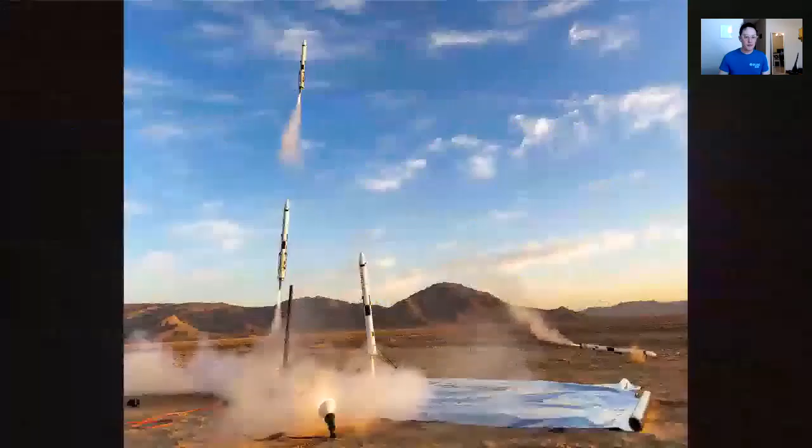We have a pretty big YouTube channel, and there's a bunch of interesting projects going on. I'm actually working toward doing a big space shot in the next few years, and I thought it would be cool to talk a little bit about finally completing the landing portion of this project. So I propulsively landed a model rocket in the last year, and I wanted to show you some of the development path of that.

A lot of these slides are just nice, pretty images, and I'm going to talk you through some of the details. I figure if you want to toss questions as we go in the Q&A, I can try to address them during the presentation. We can do a Q&A after as well, and I'm happy to bring up other materials or whatever.

This is a great little composite photo - I think this is the first flight of the rocket that ended up landing. I've built a bunch of iterations of this model rocket, but this one is called Scout F. There's been Scout A, Scout B, Scout C, all the way up to F now. This is the first flight.

You'll notice it doesn't have fins. It uses thrust vector control to keep itself upright, so it gimbals the motor at the bottom. And then when it comes down, you can kind of barely see over here, there are these landing legs. Let me make sure I can move this out of the way so I can point with my mouse.

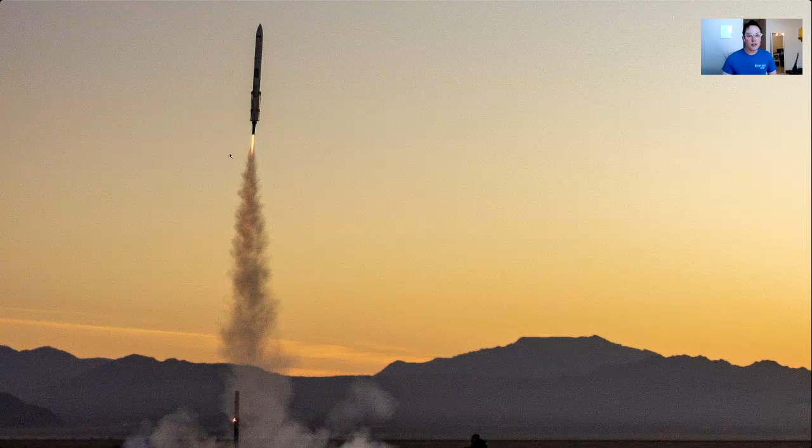So we've got these landing legs down here, and obviously this flight doesn't work well, but I've got a couple of nice photos here. You'll also notice the motor hangs out very far from the back. This is an Estes F-15 rocket motor, hangs out super far from the back, and that's just our ascent motor, and we ditch it upon the time that we're supposed to land this rocket.

So this is it coming in. I like to think of this as the entry burn photo. All of the exhaust goes up in the wrong direction, and you can actually see right here, this is the ascent motor that's getting ejected off by the landing burn startup.

This is another photo, really compressed, so it makes it look like the rocket's a lot bigger than it actually is. But all these launches happen at dawn in the desert because I really want that beautiful light. Getting the sky like that makes for really compelling photos.

So I figured we'd start off with just some pretty photos of this rocket, but why don't we talk a little bit about the technical details, and then we can get into analyzing the flights and seeing how things happened there.

So this is the flight computer that ultimately ended up working for the landing, and I can talk you through it a little bit. This is called AVA - it stands for All Vehicle Avionics, and it's a computer that has been developed over basically the last 7 years of just iterative design, trying to figure out what is necessary for this project and what is not. It's a little tricky because this has a lot more going on here than is actually needed to land. Frankly, if you have a good IMU and a nice processor, you're 90% of the way there.

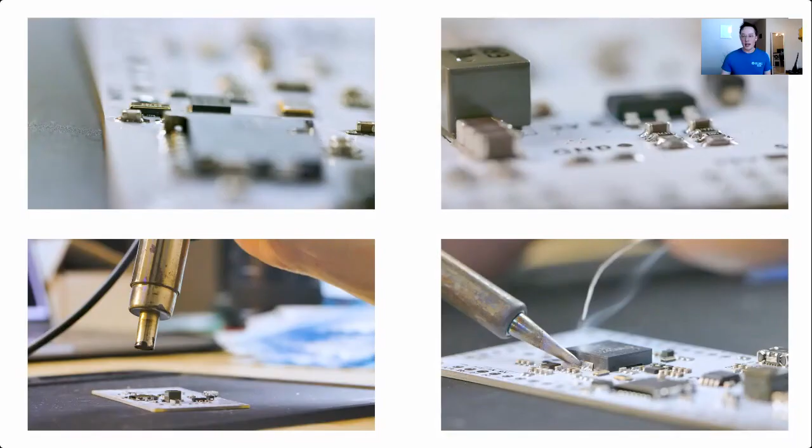That is not really important for the propulsive landing stuff. These flights are about 10 seconds. If you've ever seen one of the videos that I make, it's about a 10-second flight. So over that course of 10 seconds, you're not looking at your computer screen that much. But Ava is a pretty densely packed board of lots of little resistors, processors, sensors, and things like that. I thought I would just include some nice looking photos in here of Ava, and then one more from the side.

We've got all of these terminal blocks because the idea is that you want to never build another computer. That was kind of the impetus for this. I never wanted to build another flight computer. I wanted this to be able to serve the function that it needed to serve. So some of the decisions for this rocket end up being in service of the larger project. I want to do a space shot. I've got a high G accelerometer on here that isn't really required for the propulsive landing stuff, but this board can certainly get it done.

Moving on, the thing that makes this really work in terms of software is a really important part of this project. And I think specifically the Kalman filter is where a lot of the special sauce is. This is, if you've ever heard the audio of 'the missile knows where it is,' that's what we're talking about here. The rocket needs to know where it is.

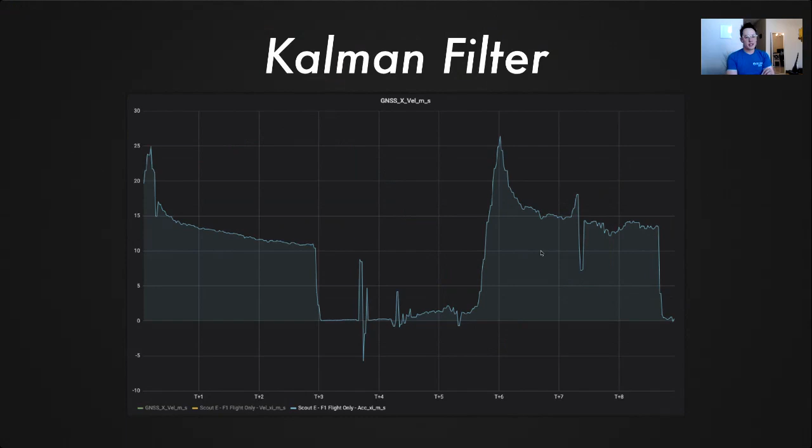So let's look at an example here. This is our, it says GNSS_X_Vel, but this is an acceleration plot of a propulsive landing. I don't believe this one was successful. I think this burned out a little early. This is from a flight of an older rocket. But either way, we've got these acceleration measurements.

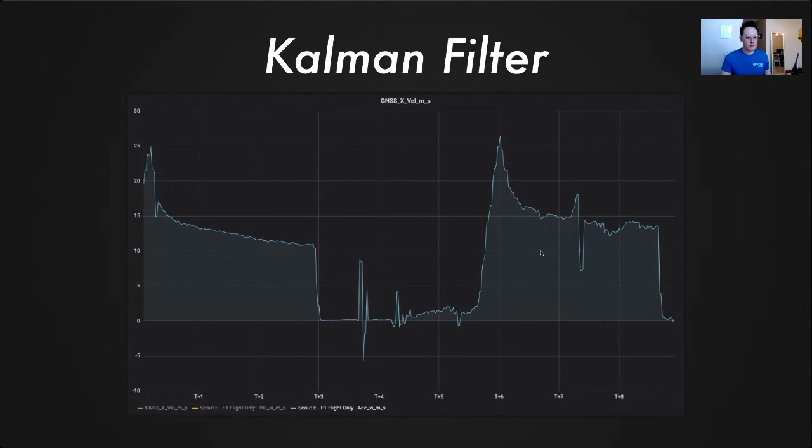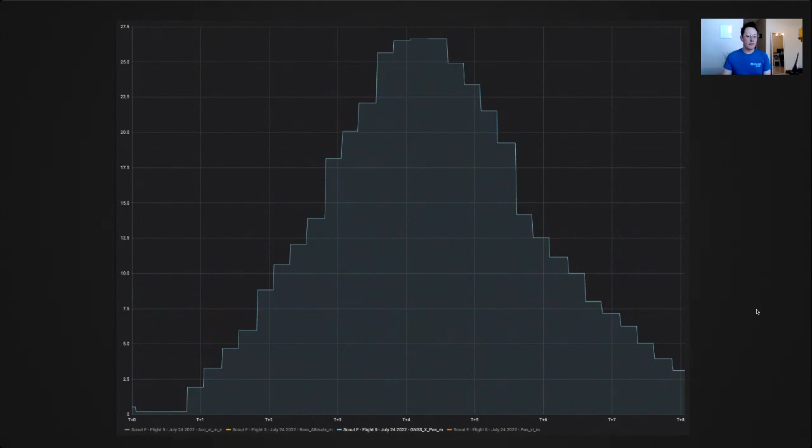What else can we use to determine how high the rocket is? Well, I said earlier, Ava has a GPS, so we could use the GPS measurements. These are GPS measurements that come in. They're fairly low-ish accuracy, especially vertically for GPS. They're also pretty low update rate, so this doesn't work super well. So we've got like a very noisy barometer, we've got really good accelerations, and we've got not noisy necessarily, but just not high quality data from the GPS.

We aren't going to get too into how the Kalman filter works, but essentially it was several months of development for this project that focuses on this filter, which basically just weighs the certainties and accuracies of different sensors and then combines them to estimate exactly where the rocket is. And if you're lighting up a landing burn, if you're trying to do throttle control, if you're trying to do really tightly timed or coordinated events during a flight, you have to have a really high precision estimate of where the rocket is in real time.

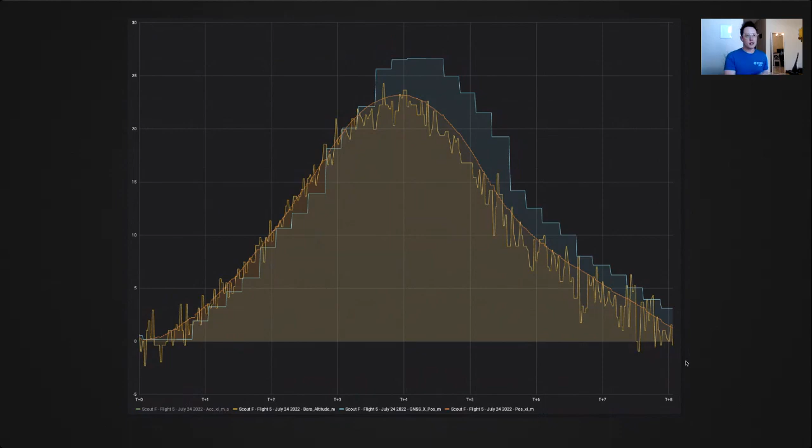So that is the Kalman filter, and that brings us sort of to simulation. Simulation is a really big, really all-encompassing word for something that is very nuanced. There's a lot that goes into it, and we're not going to talk too much about the attitude simulation.

This is the attitude simulation. It's a bunch of lines, looks like a big pot of spaghetti. Essentially we're working in a program called Simulink, so it's probably not worth getting too into this.

This is basically all of the stuff that goes into keeping the rocket upright and trying to have the rocket touch down on the landing pad. We ultimately couldn't get the landing pad part to work, but a lot of these things would look simpler if it were just coded out.

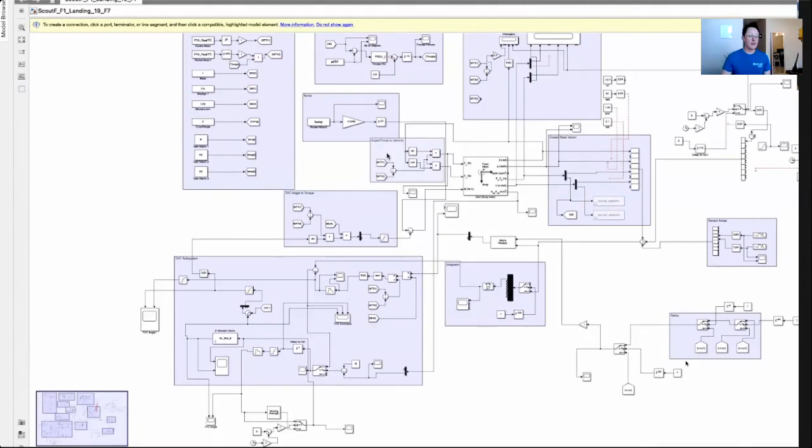But I think the thing that is more interesting to talk about with simulation, because for years now, myself and other people have been able to get TVC, thrust vector control, to work at the hobby scale, been able to keep our rockets upright and on course. I think the more interesting thing though is throttle control. So I'm gonna let this video play, a couple of times in case you miss anything.

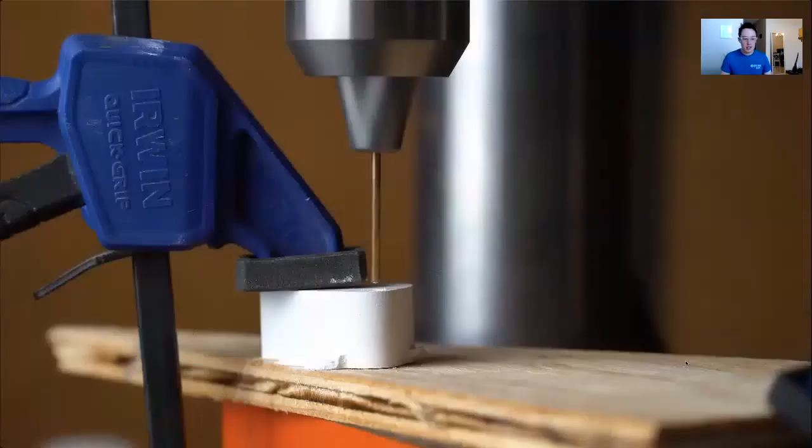And finally, for this F iteration of Scout, I developed a throttle control system for these little black powder motors. It actually works for APCP too, just a little bit different because there's some slag buildup that happens.

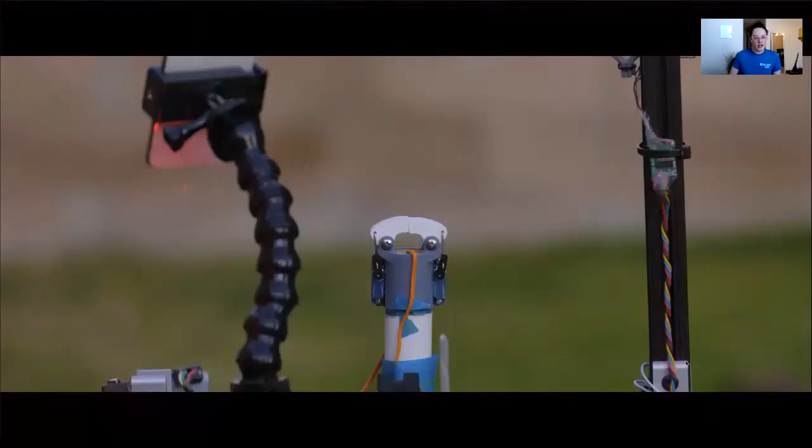So essentially what we've got here is this high temperature ceramic material, specifically a really easy to machine version of this ceramic material. So you put these two paddles in front of the motor, and as the motor is burning, you can start to clamp those paddles down and redirect the thrust out to the side. You're redirecting out to one side, and then there's also a channel for the exhaust to flow out the other, so you try to evenly distribute it.

One thing you'll notice here too is the exhaust actually deflects to an angle, and this was my biggest concern with this throttling approach. I've tried a couple of different things - sometimes people suggest like an iris that can clamp down on the flame. The biggest concern here though is side forces - determining when you have a little bit of an angle in your thrust output. You don't want to vector your thrust when you don't want to. You want to have total control over where it's pointed.

Manufacturing was also kind of a tricky thing for these. You see, I'm not peck drilling here, I'm not retracting the drill bit, and so the pressure inside the material builds up so great that it actually fractures. So it took a couple of tries to get this right.

But one more time, just before we move to the next slide, I want to point your attention to the direction of the flame. If these two clamp arms aren't coming down exactly evenly, you end up directing the flame to the side. And when we zoom in here in a second, you'll be able to see pretty clearly, the arms are not quite aligned and the flame sticks, it adheres to one of those paddles. And we ultimately vectored the thrust.

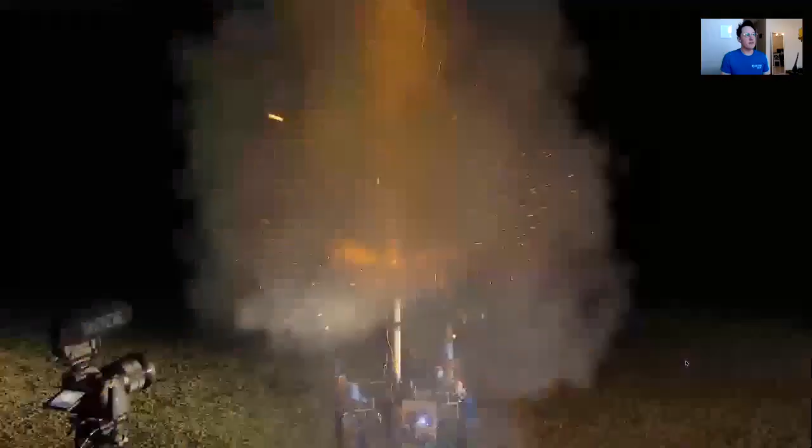So the question is, how much of an effect does that have? I actually ran a ton of these tests. Here's some more footage of the throttle control testing. I think I ran in total 6 or 7 of these throttle control tests, and I'll show some plots for this in a little bit.

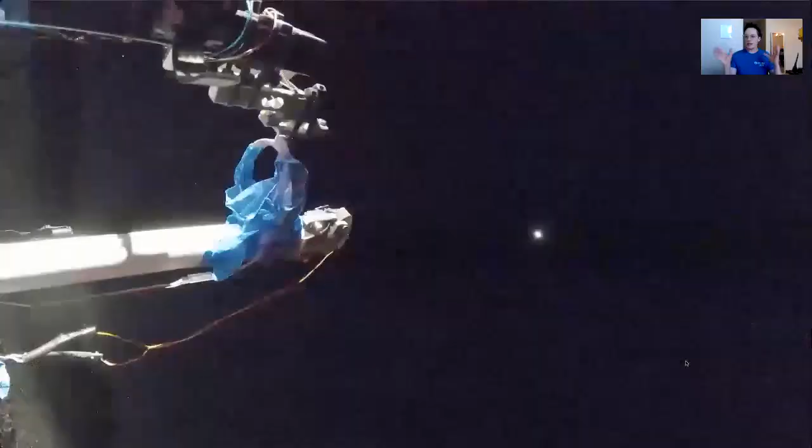But on each one of these, I'm running the same profile, basically the same amount of clamping down on the rocket motor, and then measuring those things with a load cell on the side, and then just sort of seeing how many times can we reuse the paddles, because they don't actually erode that much. They erode a little bit - you can reuse it. Ultimately I think these were like 2 or 3 times before it becomes a problem.

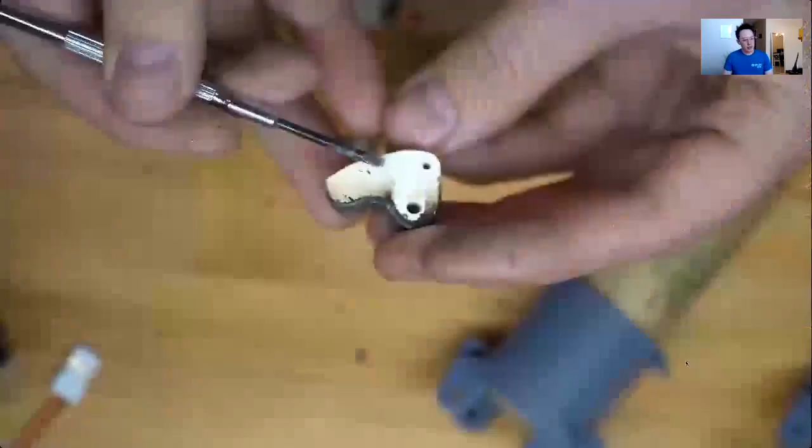Another good shot of the side force here, and then I think in a second you'll be able to see some of these load cells. I've just tossed a bunch of footage in here and figured we could talk over it. One second, yeah, here we go.

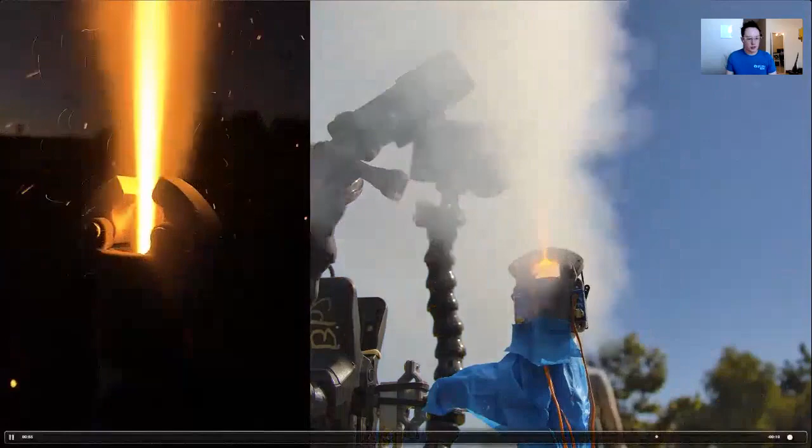So on the side, if you look down in the center of your screen right here, this is a load cell measuring the side force when the rocket motor has a plume that isn't totally in line with where we want it to be. And ultimately, I don't have a plot of the side forces here, but I do have a plot of the axial force. The side forces turned out to not be a huge deal. The axial force - this is like a beautiful plot to me, this is like a work of art.

I mean, we can throttle down to something like 10 to 15% of the total thrust, and this was really promising. I had tried a couple other throttling methods before this - we won't get into those today - but having this much throttle control is frankly overkill. In the simulations I ran for this specific vehicle, we probably needed about 20%, plus or minus 10% thrust. And this is plenty. So these are the results of the throttle control stuff.

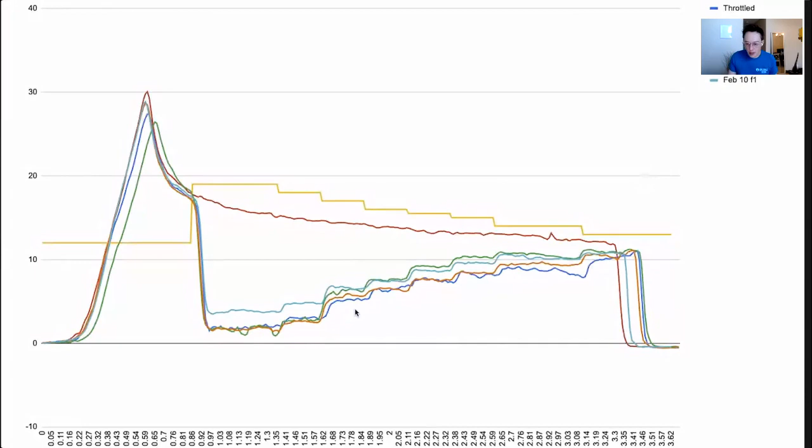One thing I developed for Ava is this thing called software in the loop. This is common among real aerospace companies, and honestly way beyond aerospace as well. Software in the loop means we trick the flight computer into thinking it is flying. Then we take a look at the commands it generates, how it steps through the flight software, and we can analyze in much better detail, in a lifelike testing environment, how the computer is going to perform in flight.

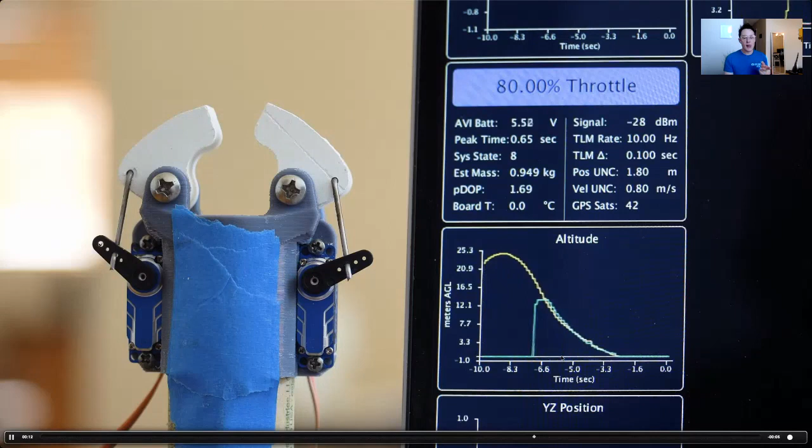Essentially, after looking at a bunch of data from past landing tests, I came up with an ideal curve that the rocket should follow roughly to, when the motor starts up, get to the ground. Throttle control is kind of a weird thing from a control system perspective, especially with a fixed burn time and a somewhat fixed burn intensity - if you're trying to target a point, it gets way harder. But even if you're not, what we're doing is basically these throttle clamps closing and opening to try and get us to follow that curve. That's sort of how the throttle controller works.

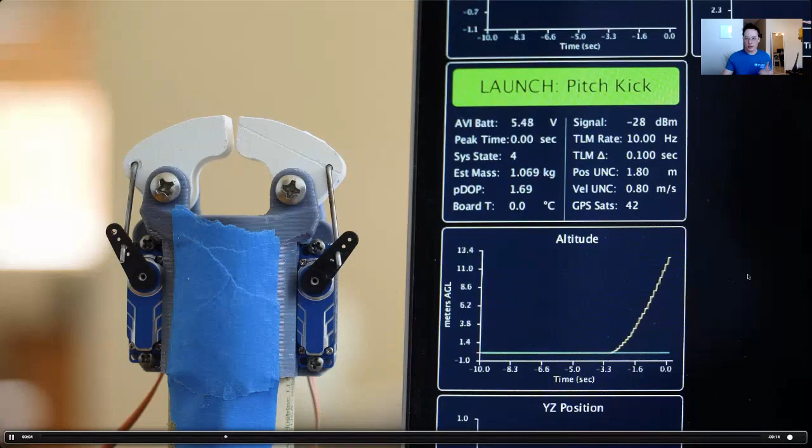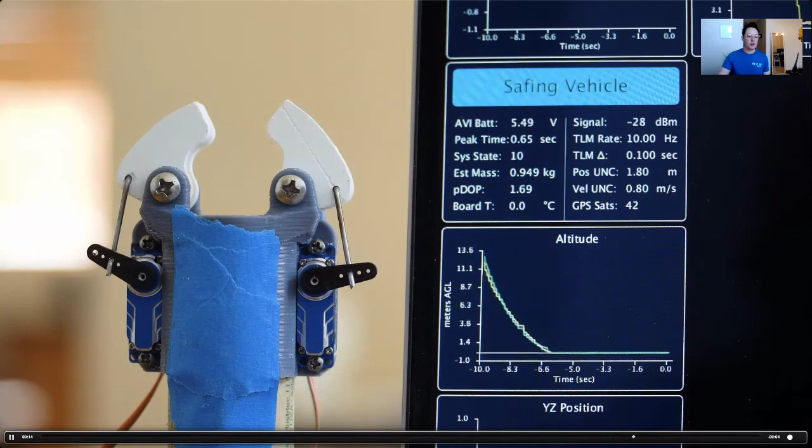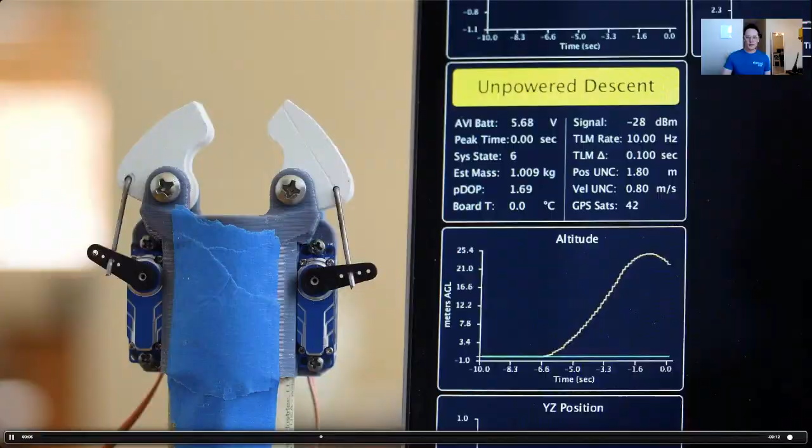Okay, the next thing I want to talk about is landing legs. This is, I think, probably where I made the biggest mistakes throughout this project - not dedicating more time to development of the landing legs. Legs are really difficult to get right, especially if you don't have control over all the aspects of the surface you're trying to touch down on. This is a tricky thing to know if you haven't done it before, or don't work with it already. But basically, you're trying to absorb energy without putting it back into the system in a way that will make your rocket spring back up.

If you're familiar with any of these previous flights I've done, you've seen the countless times that the rocket has gotten really close, and it hits the ground and bounces. It springs up and falls over. And that's all in those legs. So this design is all right, but I'm not super proud of it.

Here's some footage of these legs folding out. I've got a bunch of this that just sort of loops. One of these clips actually shows the way these legs fold out. If you look closely, I can pause the video. Okay, we're gonna hit pause, I'm gonna drag it over here.

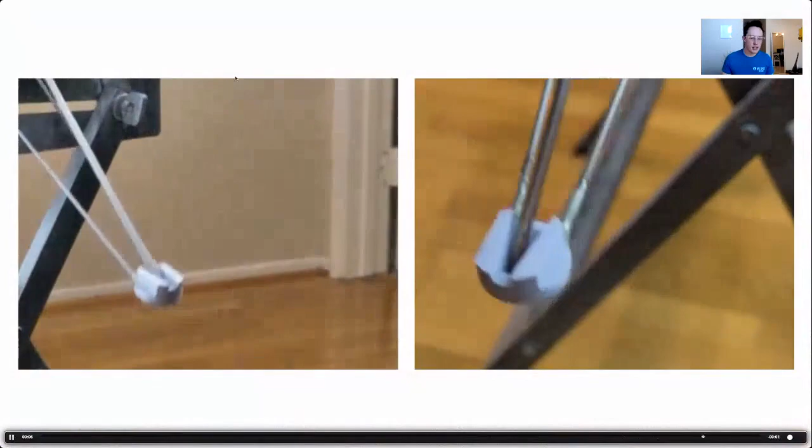If you look up right here, this is a nichrome wire that has heated up so much that it has burned a rubber band holding these legs back. Basically, the legs start off closed like this, and the nichrome wire melts this rubber band, and that's how they fold out. Then the leg slots into place like that. It locks out, spring loaded by these rubber bands that pull it down, and that is how they work. Towards the end of the program, I did end up changing this design.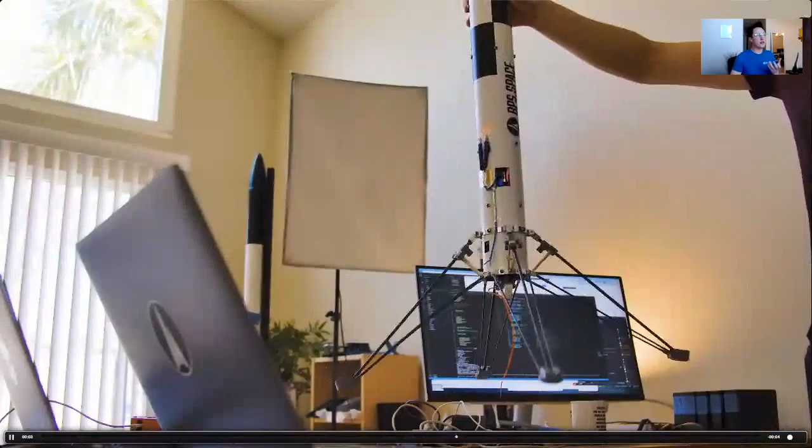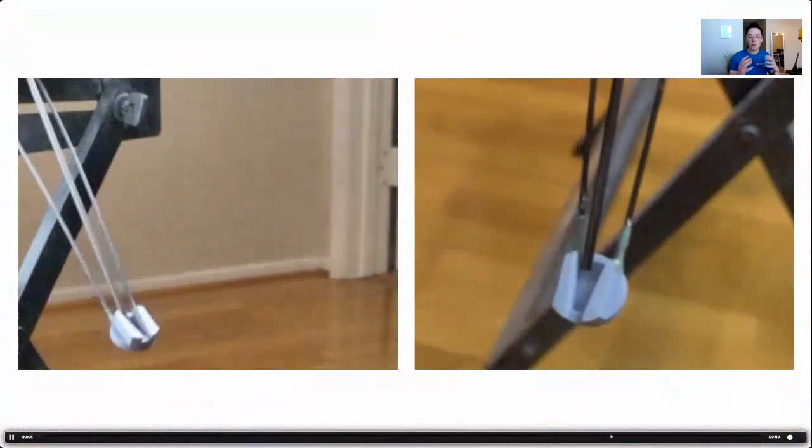I added linear dampers, basically. These are things filled with oil that just can't move very fast. I added linear dampers to the end of the leg, and that helped a whole lot. It was really tricky to think of how we could work within the mass budget to dampen the shock of the impact, but these little linear dampers I added right at the end seemed to make a big difference. I think if I were doing this again, I would dedicate a lot more of my mass budget to having good legs, because you can solve bad control systems with good legs when you're landing things.

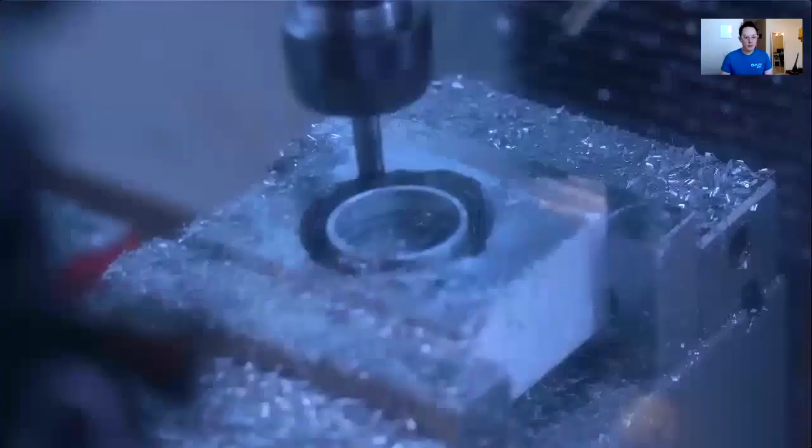Okay, we can talk a little bit about the TVC mount, or the hardware that gimbals the rocket motor. This is me milling it out. It was definitely not necessary to make this out of aluminum. I had some problems, which you'll see in a little bit, with wiggling on the hardware that actually gimbals the rocket motor, so I went a little crazy with just making this part as rigid as possible.

So I milled out of just billet aluminum these parts for a gimbal mount that is all metal. There's no slop in this, no play, no backlash. That's especially important when you have these two F-15 rocket motors stacked on top of each other, because you have a really tricky moment arm situation where it just wants to be spring loaded. So this was the development of the TVC mount.

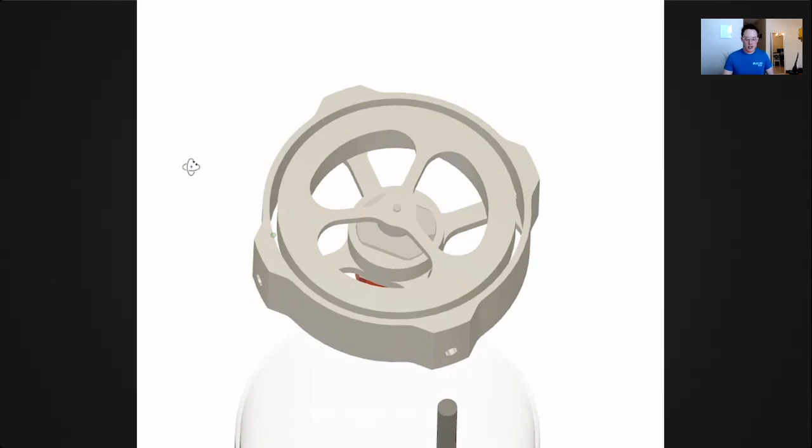One of the things I wanted to mention was the reaction wheel on this rocket. This is probably something I would cut if we were getting really tight on the mass budget and needed to have something elsewhere. The reaction wheel controls the roll axis, it basically spins up or down the rocket. It's made out of aluminum for the first flight, and then I started replacing as many parts as I could for the subsequent flights to conserve mass.

Then you can see what happens here. Basically, the wheel spins up, and it spins up the rocket as a result. This is an exchange in momentum in the system. So the reaction wheel controls the roll axis, but it is not strictly necessary. We're not going fast enough that we get crazy aero torques that roll the rocket. We get little ones, and the only reason the rocket would roll is because of those little tiny, very hard to predict disturbances. I'd say 70% of the time, it isn't a problem when the rocket rolls just a little bit.

It's that extra 30% of the time. Sometimes these F-15 rocket motors, something happens in the nozzle where they do a little bit of channeling in the clay, and that results in the rocket spinning up quite a bit, because it's not a very strong force that spins the rocket up. It's just that the mass moment of inertia on that roll axis is so low that it's very easy to spin it up, and past a certain rotation rate, you start to lose your control authority, or at least lose the quickness of your control authority.

So with this covered, I figured we should take a look at some of these flights. So this is flight one. It has a little bit of a delay here, but we'll watch it a couple of times. So we go up, motor is pretty wiggly, come down, light the motor, get out the legs, and we do a beautiful little flip. That aluminum or silver shiny pad next to the launch pad is our landing pad. The goal was to land 2 meters to the right and no meters back and forth, basically just pivot over and come down.

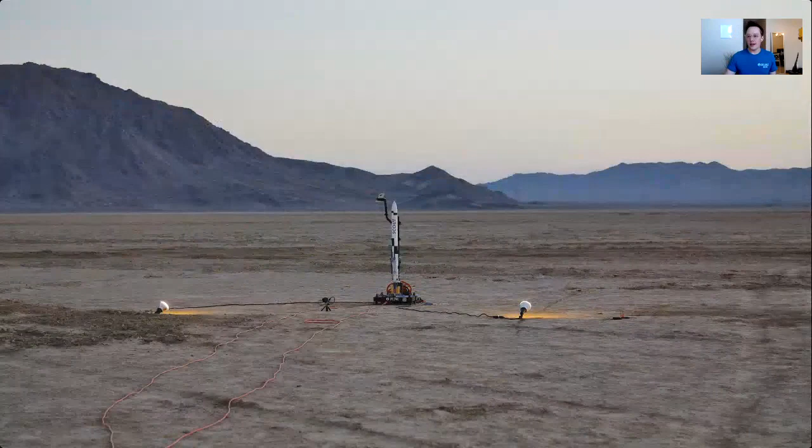So let's move on, let's go to flight 4 here. This is flight 4. Okay, here we go. This one looked great until the very end.

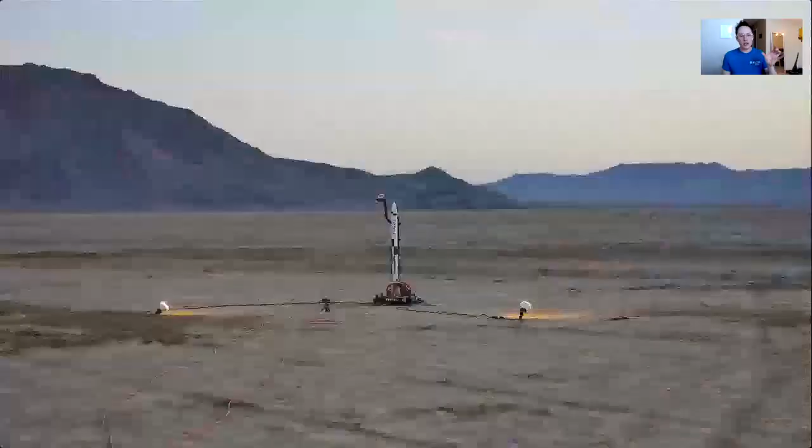Really smooth. At this point, we're no longer using a landing pad. I've realized that because of how uncontrolled we are in that mid portion of the flight, we shouldn't try to use a landing pad. We should just try and get down to the ground, touch the ground, wherever we land.

We hope it's not one of these lights that light up the pad, we hope it's not directly on top of the launch pad. And statistically speaking, it's probably never going to be there.

The problem here, though, is that the legs don't come out. This is a little bit of an issue with how I deploy the landing legs, because there's this little nichrome wire that burns a rubber band. It's inherently a tricky process to get it to be the same every time.

It's like a pyrotechnic device. By testing it, you lose the device, right? Once you test a black powder charge, you lose all that black powder. So you can measure the same amount of black powder, the same amount of resistance wire or nichrome wire, but it's never going to be quite the same each time.

And this one, we played it a little too close to the chest. It could never get those landing legs out. Honestly, we hit the ground fairly hard anyway. So it wasn't going to work out, but it did set the stage for flight 5, which we're going to look at right here.

So this is flight 5, and I've got this playing back in quarter speed slow motion because it is glorious and wonderful. We have a really clean ascent. Once again, that dawn sky just looks beautiful here, and it makes the F-15 look a lot more intense than it actually is. So pretty good ascent.

We slide to the right just a little bit, but very good control, very tame control. And this is our coast period here. Once again, would benefit from some type of control during this period, but wasn't too bad on this flight.

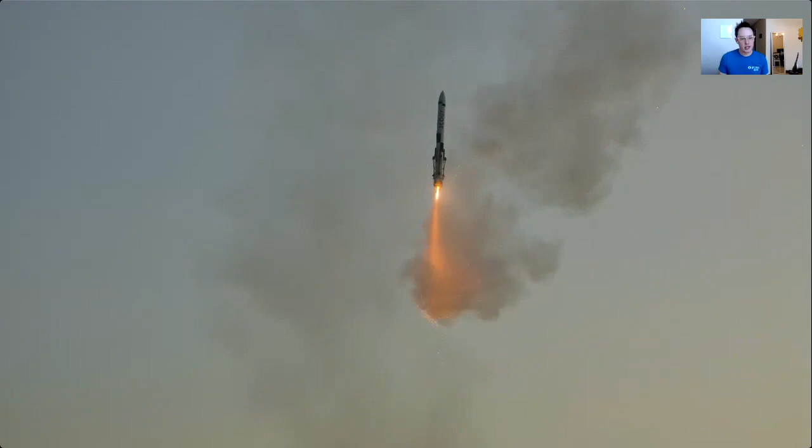We have our landing motor that comes up to thrust, and as it's coming down, I want you to look at the bottom of the rocket and look at the sparks that come out the side. That's our throttle mechanism working.

So the sparks come out the side because the rocket is trying to get, exactly what happened there, our thrust to match that descent curve so that we can touch down on the ground. And it necessarily means that some of these touchdowns are going to be really hard because we want to time it perfectly with the burnout of the motor.

So some of them are going to be really hard, and some of them are going to be just like a picture perfect touchdown. So we're going to let this replay here. All right, here we go. We've got liftoff. Think of what else I can tell you about this flight.

Yeah, it was a really good day. I don't know how to talk about it, honestly. It was a really good day to finally have this project completed after all of the work that went into it.

But yeah, here we go. We got the landing burn. You can see the ascent motor gets ejected. The landing legs come out at just about the right time, and we come down at a little bit of an angle.

One thing I was never able to totally solve in the program was dealing with the final portion of the burn. Something would happen in the control system at that final part of the flight that I could just never fix all of the bugs in. And so there would always be a little bit of attitude error at the end where the rocket knew it wasn't pointed in the right direction and it was generating the commands to point in the right direction.

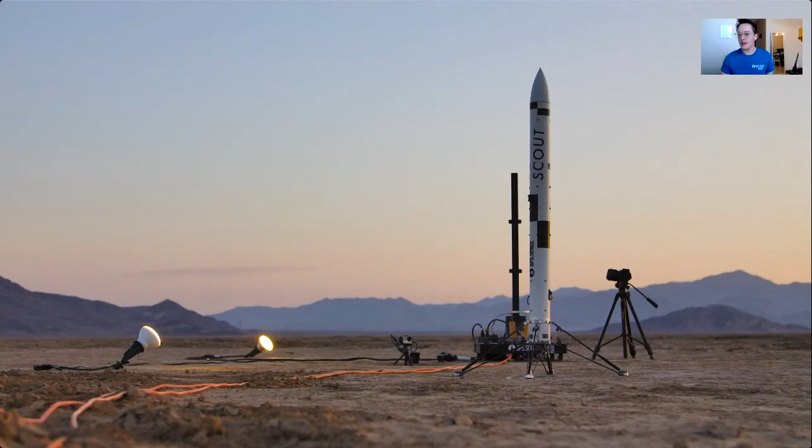What are you giving to the National Air and Space Museum? Well, I don't have any plans right now to give Scout to the National Air and Space Museum. But I do think it would be cool to do something with the rocket. It's just sort of sitting in my back room right now, pretty much unchanged from before. But I think it would be pretty cool to do something with it.

Are you going to be using the Loki 6-inch Q hardware for the space shot motor? So the space shot is an ever evolving situation right now. I'm trying to do as much of it myself as I can, so I want to build my own motors, but I'm still in the phase where I don't know how much of it I really can do. Right now I'm building an O motor, a 6-inch O motor. I'll have a video about it on the channel hopefully soon. We poured the motor, mixed all of the propellant, and I've got a case, a liner, the closures, the O-rings, all the things you should need to build a motor. The reason I'm doing it is mostly to see how hard this is, because propulsion seems really, really difficult to get right.

And also, you know, it's a fun challenge. You don't do a space shot because it's easy. Honestly, it's kind of a vanity project, right? You do it because it's like the glory of doing it. But I would like to try building as much of it as possible. I haven't looked at the Loki 6-inch stuff, at least hardware wise. But I have found that it is pretty difficult to get a reliable 6-inch diameter tube without paying a ton of money. Basically, if you order stock material for a 6-inch diameter motor, the chances that you actually get a 6-inch tube are quite low.